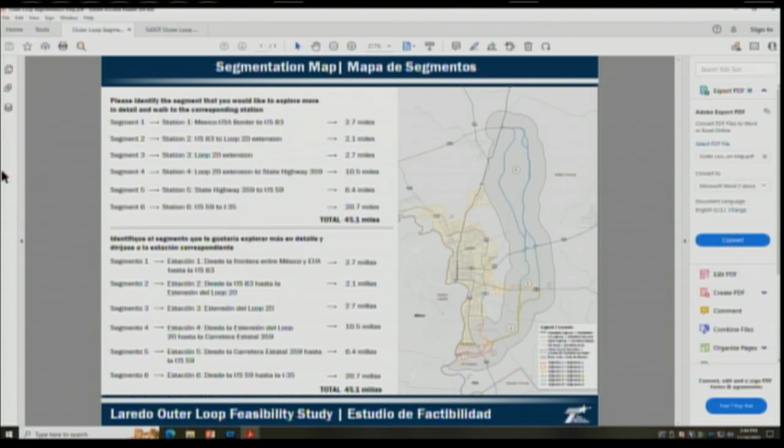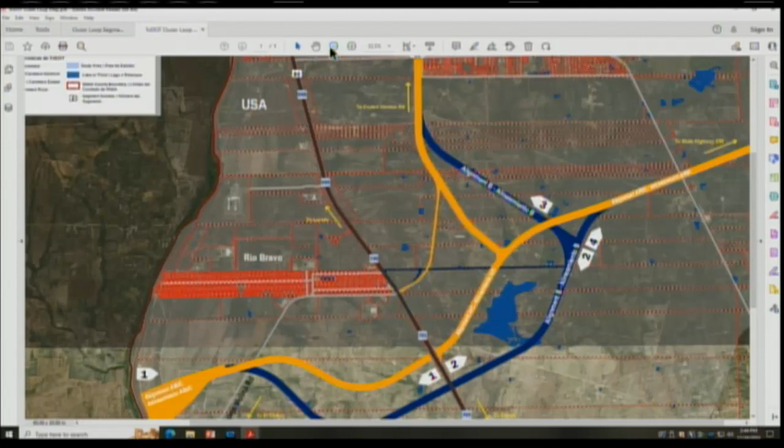With that said, you've said a lot of things, and I'm going to try to answer as much as I can because I think it's important for the public to know. You've made a couple of comments stating that we have not given you an opportunity to come in on this project. Mayor, with all due respect, it's a slap in the face to me, not to you, but I just want to point this out to the public. You had a couple of agenda items at City Council pushing the county away from our own project. You were the swinging vote, if I want to remind you and the public, to go and push Webb County completely out of the way for the city to do that.

What people don't know, and I'm going to make this public now, is that the day before, you and I and Robert Eads and Mr. Lalo Uribe stayed there in my office, and I appreciate you going to my office. For 2.5 hours we met. The first question I told you was, I just want 1% of the revenue. And you laughed at me. And Robert Eads laughed at me and said, why should we give you anything? That was what happened at that meeting.

And in all good faith, that is something that you've been using quite a bit to the county, that we're trying to work in good faith. There is no good faith with what happened at that meeting. With 1% of revenue, that's all the county was asking. And I threw it out there because I wanted to show that it wasn't in good faith that we're working.

And I will tell you this, regardless of whether you're here or not, Mayor, at the next council meeting, I will do everything I can, and I'm saying this publicly, but I'm tired of the way the City of Laredo is positioning itself, starting with you, Mayor, because you are the leader, or were. It's very disturbing to me that you bring up things in public, and I've kept my mouth shut for the longest time, because in all good faith, it's not Webb County or the City of Laredo that's losing. It's all of us that are losing.

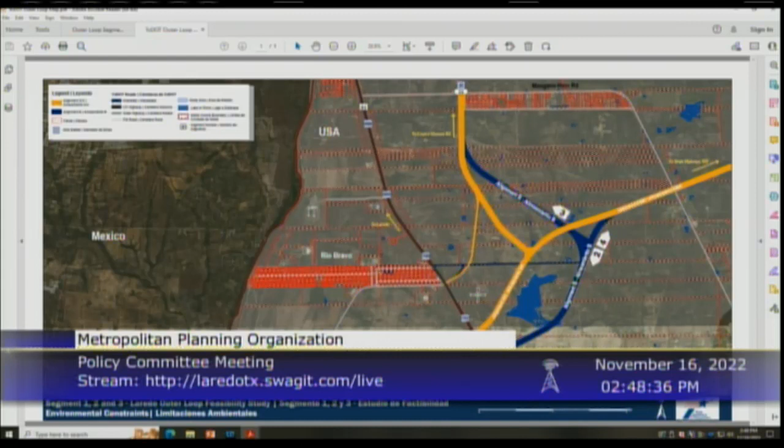If you have a problem with the 4-5 bridge, by all means, let's take segment 1 away and just do 2 and 3, because this is for the outer loop and mostly for the connection to finish off the loop. Because right now, you're not just hurting the people in the north, you're hurting the people in the south as well.

Yeah, let me just contribute a little more to that, just so we can be clear. Yes, we had that meeting. Let me go back to that meeting with Robert Eads and myself.

Mayor, Mayor, it's just about the agenda. It's unfair. No, but it's unfair that you started. I'm just trying to finish off. But let me explain. Hey, Mayor, if I may, please. Yes, sir.

These agenda items, I mean, this MPO is here to promote Webb County, the city of Laredo, which is a majority of Webb County, and that's all we're here for. I sat in this very seat. I know exactly all the issues that you all are looking at. I sat here, and I've expressed them to the judge, and we've talked quite a bit about it. So I think whatever we can negotiate will be a fair and equitable position.

Absolutely, because I'm an advocate for the city of Laredo. We all live, well, I say all of us, but the majority of us live within the city limits. We understand what the bridge revenue does. We understand about the bond covenants. We understand all those things.

So, Mayor, whoever's going to be there, I think we just need to have joint meetings, sit there and talk about it. We need TxDOT's input, we need public input, and sit there and hash something out. And we will, with the new council and the new commission. And I think let's just leave it there.

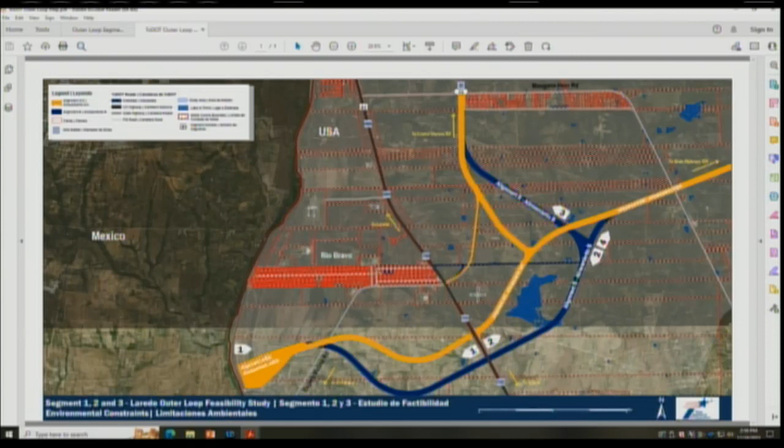But I think there's tons of opportunity here to expand how much money we get. And I see the situation with Hachar - instead of being reactive and using everything you have in one kitty to solve the problem, I think being a little bit proactive makes both things able to happen without hurting each other. What that does is it delivers 2 projects instead of 1 project, and then whatever's left over delivers another project.

Did I miss anything, Judge? Let's see, could I ask, do you concur with that? So I guess the additional or alternate funding that Mr. Garza is talking about is category 12. Is that a fair statement?

Mm-hmm. So that is something that we can certainly pursue. However, there's also the risk that this category 12 funding could be allocated for outer years, which means we'd have to delay the project further out, right? Delay the Hachar-Reuthinger project? Correct. So again, that's certainly an option.

I think we should pursue that option as well. I think we're at a point where we need to make a decision. Based on the presentation we're going to make here in a few minutes, we have to provide guidance to our consultant on which alternative we're going to pursue shortly, and our goal is still to meet that August letting, right? I know Mr. Garza may think that's a bit ambitious, but that's what we're trying, that's still what we're shooting for.

So if we potentially push the project out to be able to consider additional funding, that may be something we'll continue to investigate and pursue as well.

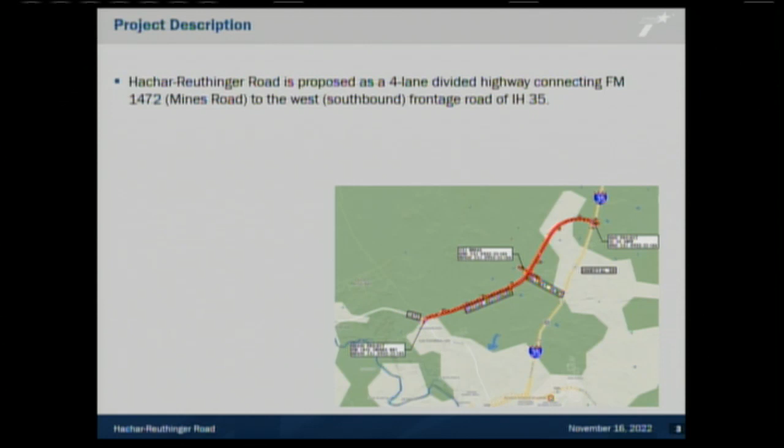Anna Duncan with TxDOT for the record. I'm going to present a little bit of what has happened, where we are now, and where we need to be. Briefly, to go over these items: the project, as we know it, is from FM 1472 all the way to I-35, and the proposed project is for a 4-lane divided highway. We have 3 bridges at 3 major water crossings: Cuervo Creek, Sombrerito Creek, and a tributary. There are 3 proposed intersections as well, about a mile and a half to 2 miles apart. One of those is, of course, Beltway.

From the utility side, we haven't gone in depth to that. That'll be part of what we work on with the city of Laredo. But there are 3 major high voltage power lines crossing, and several other utilities in the area. We'll be working on a full PS&E to include the grading, paving, bridge, drainage, traffic control, signing, pavement markings, and miscellaneous details.

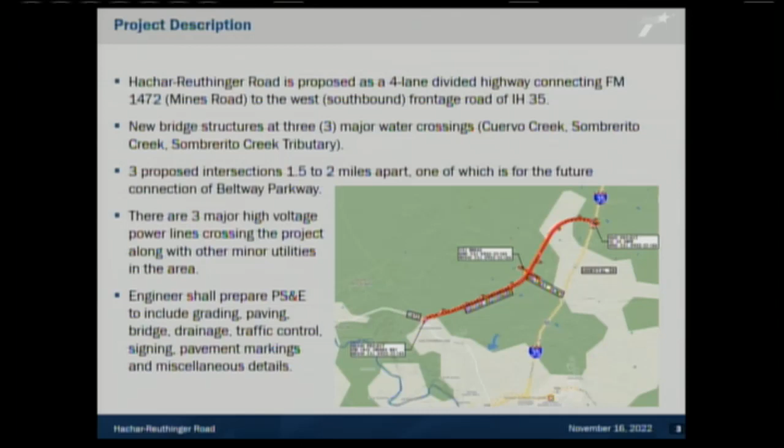And I'll stop you because you said it was for a 4-lane freeway. A 4-lane divided highway. Yes, but from the reports we've had here, they're only going to build the frontage roads. That's what they are, that's what they're identified as. You'll hear the explanation as to why that's the nomenclature we're using.

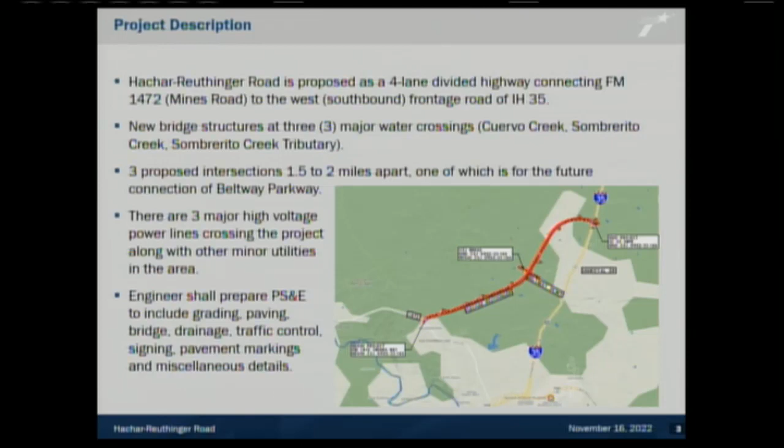Okay, so give me a few minutes. Okay, my ADD won't let me do it, but okay. I'm gonna remember it, I'm gonna remember it.

Just to go through the history: it was in 2016, 2017 when we had those AFAs executed with the county and with the city to begin both the Hachar and the Reuthinger phases. It was in August 2018 that Dannenbaum was contracted to begin work on the county portion of the Reuthinger. That contract expired at the end of December '19, and it was in June 2020 that we received that wonderful $51.7 million estimate we talked about.

Later that year in October is when we started having discussions about TxDOT possibly taking over development of the PS&E for the project.

In April 2021 is when we had that first AFA amended so we could begin doing the PS&E under TxDOT. In May, we did the AFA to amend the environmental with Webb County, so at this point TxDOT does have the authority under the AFA to do that work. Come May, we were requesting all the additional information that Webb and the City had to begin moving forward on the project.

In July 2021 we began receiving all the CAD files that were available and had been provided to us. That information was relayed to our consultant, who we had in mind to work with. They began reviewing it, and there were items missing: the draft drainage report had unincorporated comments, so we didn't have a final one. The ITS—Intelligent Transportation System—items like cameras, DMS signs, and lighting were not included. Survey control sheets were also not provided, and survey control was not established on the project.

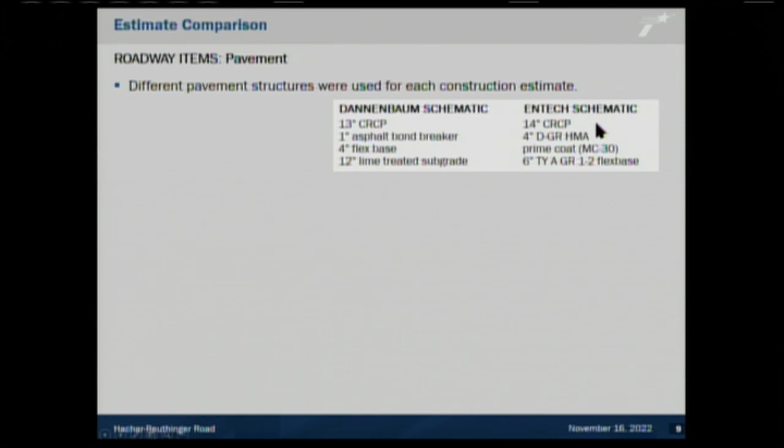We looked at the pavement because we needed a pavement structure that would withstand the truck traffic and meet state standards. So that is what we got to. That was an $18 million difference.

We looked at earthwork also. That was a $453,000 difference, and that's because we changed the design speed. That's where your question came in about why we're calling it frontage roads versus a 4-lane divided highway. If we kept it at frontage roads, we were working on a 55-mile-per-hour design speed. By going to a 4-lane divided highway, we're able to put it at a 65-mile-per-hour design speed. That was necessary because we expect traffic to be on these frontage roads for a long time, and we want to accommodate the higher speeds.

But they still are frontage roads. Eventually you'll have a 400-foot right of way, and the main roads will have 4 more lanes in the middle someday. Eventually it's there. They will become frontage roads, right? Yeah, they're frontage roads, you'll be able to access those and everything just as they were. You just won't have those main lanes.

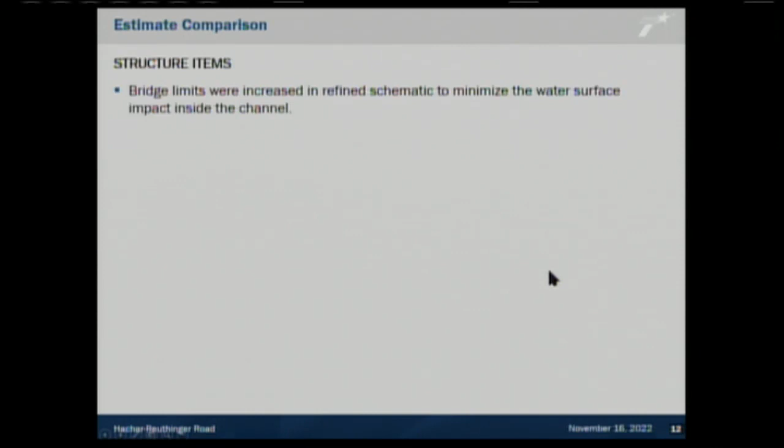So close for how long? How do we get past the current crisis of the shortfall? My question to you all is, can we complete to, if you want to show the map, Carrier Drive, which is the road that gets you to...

So I'm saying, can we phase it and do 1472 to Beltway? We have options that we've developed to show you what we can and can't do, and that's in the last slide, which comes after this.

So for our options, we're keeping the same geometry needed for 65 miles per hour, and keeping the same pavement design that's been approved to withstand the trucks. We're basing ourselves with a 10% mobilization and a 15% engineering contingency. That's what we're holding across the board.

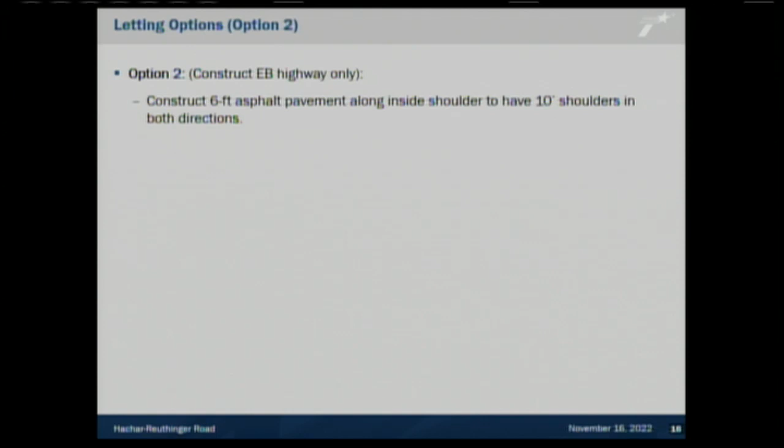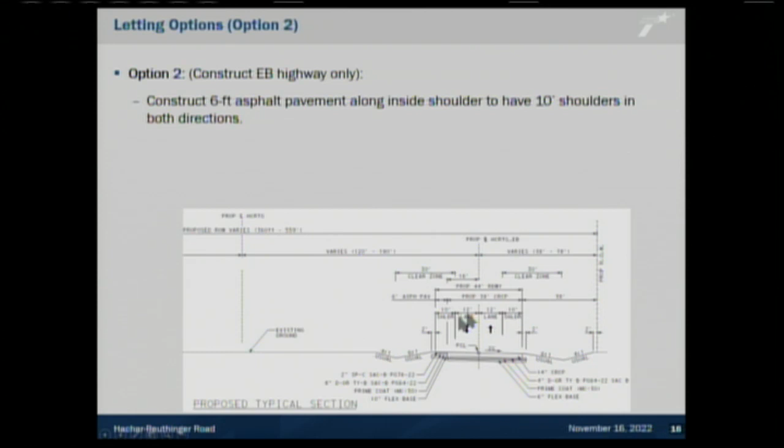The second option was to construct the eastbound highway only, so just the eastbound frontage road. Is it two-way or one-way? Well, it's two-way, but it's just on one side of the roadway. If you look at the drawing at the bottom, we would add a 6-foot segment to one side so we can have 2 12-foot lanes and 2 10-foot shoulders. Then we would have a ramp that connects back to join together, the way 255 was constructed.

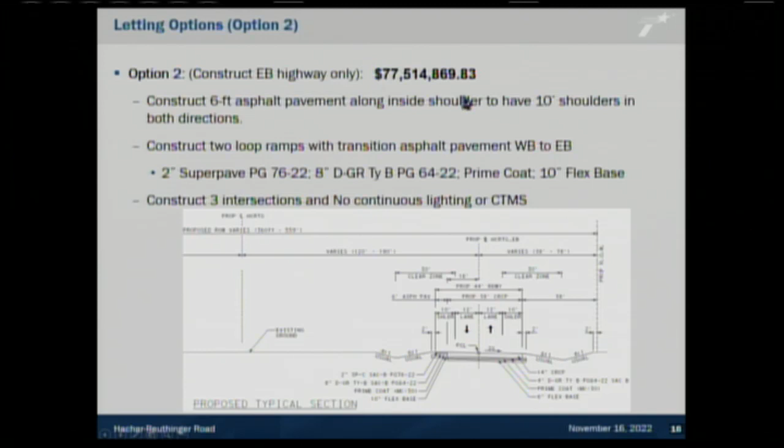That one is $77 million. The way 255 was constructed, as a single two-way? Yeah, so you have that single, and then we would just have this transition to be able to go to 35, connecting the way it's intended to connect to 35.

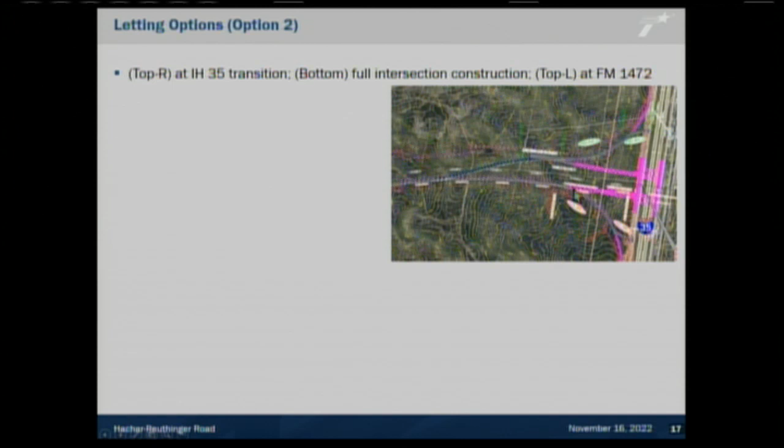Now this pink part, which is the frontage road bridges and everything that goes over, is part of the other project we're constructing, but it'll tie in to this project. That's at 35, at Carrier. So this is what it would look like. We would have two-way traffic at the intersections. We would build out the full intersections because we expect to come back in with the other side on another project soon. On the Mines Road side, we would just be connecting and transitioning back to our interchange there.

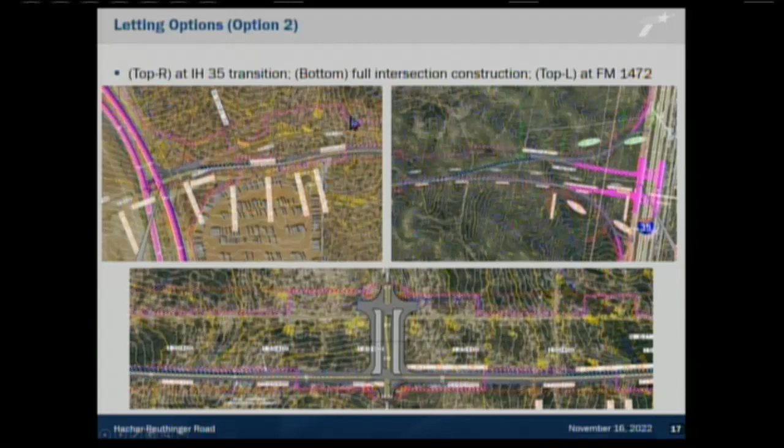So I guess the decision here then is... We're not dead, still have more options. Well, we have better options. Oh yeah, better option, okay.

This option is one of the lesser expensive ones, at $77 million. But the thing we have here is that you're building the roadway only on one side of your right-of-way. So if someone from the other side wants access, they're going to have to build a driveway that extends from the right-of-way line all the way over here.

Yeah, and ultimately when we come back with the final, that's going to go back to taking that out. The original thing is to build two-way traffic, because I don't think you want single lane, 65-mile-an-hour trucks going through like that.

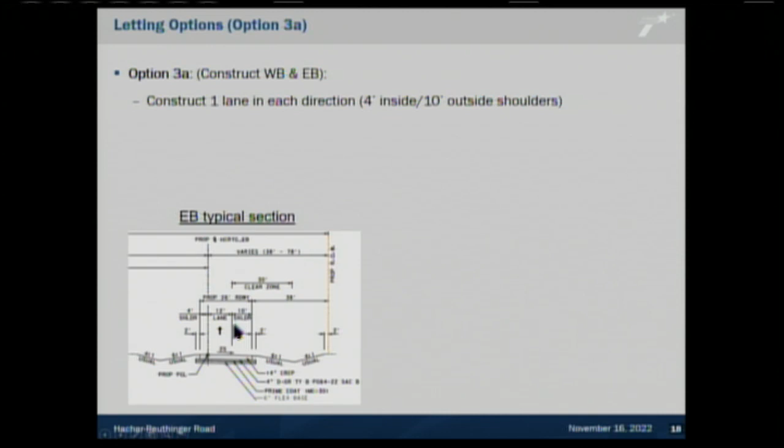Okay, hold on, I think she's got... so she's gonna get back to us with our option here. We will construct both the westbound and the eastbound, one lane in each direction with a 10-foot shoulder and a 4-foot shoulder, which is what's required.

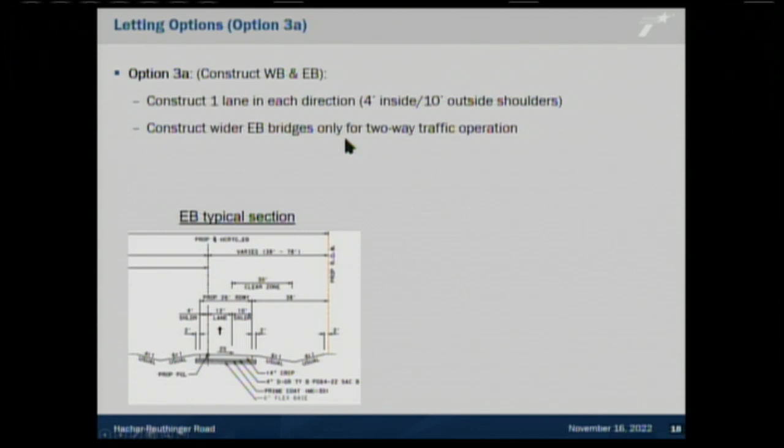We'll construct the eastbound bridges only. So when we get to the bridges, we'll transition to two-way traffic over the bridge and then come back out to have both directions of traffic. Your bridges, though, will be wider to provide for that two-way traffic.

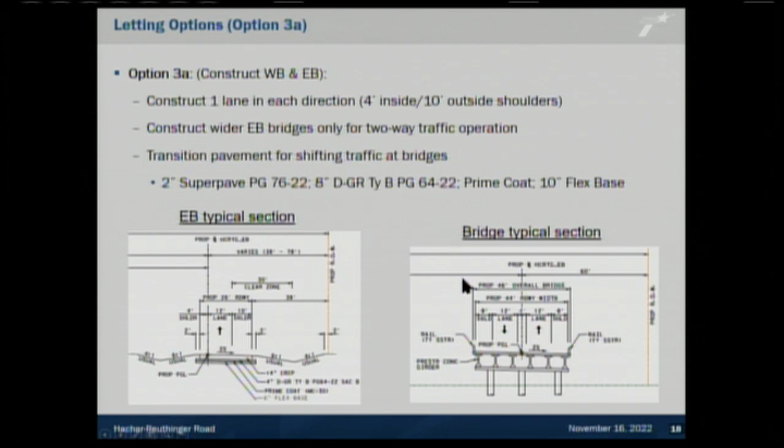You'll have two 8-foot shoulders and a 4-foot buffer in between, and again this is only on the east side. You'll have transitions using that same pavement structure, since those will be temporary. This option is $96 million.

This is what that would look like. You would have your one lane in each direction. Again, that goes all the way to 35? Yes, this is the full corridor.

And so when you come to a bridge, there's 3 bridges we talked about, you would be moving over to just one side. That way we only have to build one of the two bridges at each crossing. But when you get to 35, then what?

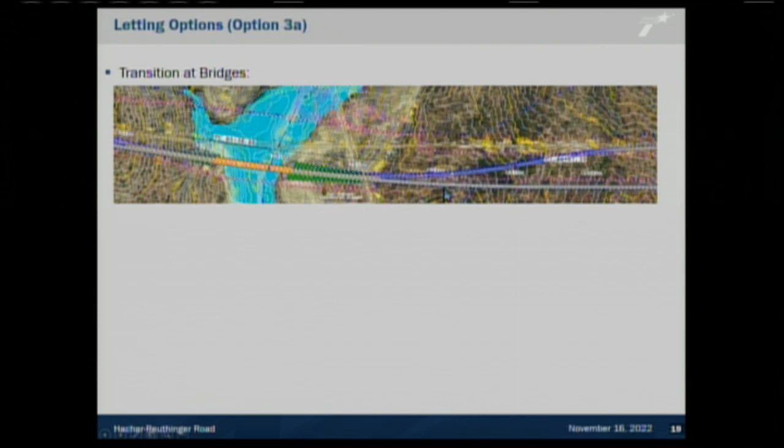It's two-way, you have both lanes, so you either go... I'm just saying you can't cross over 35, not until the other project comes in. So that other project is also scheduled.

What's the timeline on this? For this one, this project is scheduled to let in '23. What's the construction timeline? I believe we're looking at about 2 years. Has the Reuthinger portion even started to develop yet?

Do you have a cost estimate for building east and westbound up to Beltway? No, we didn't stop it at Beltway because there's also not the Beltway connection either. Well, what's the main road that goes into Unitec and Uniroyal? Beltway, but it's not constructed either.

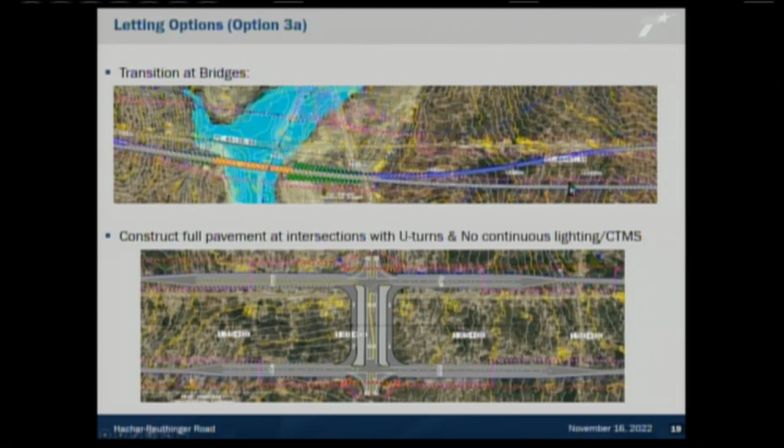Well, it's not. Okay, how much is it missing? I don't know, that's not ours. I don't know the distance. No, it's not 200 feet. From the end of it, probably 3 or more, but it's a long way to 4.

Could you identify yourself, please? I don't know if the city knows exactly how much. Jason, with TxDOT. It's about over 300, but Anna would know this project a lot more than I would.

But there's a large stretch between the Beltway intersection and the actual existing Beltway, correct? Yes. But who is building that? No, it's not on our project. That's why. I understand that, but maybe we can talk to Mr. Van Steenberg, see what their plans are, and maybe they can expedite their portion of it, because like I said, Reuthinger's not even developed yet.

So I think we need... I'd rather have the full section on the south, and I'll defer to the councilwoman, but it just seems like that would be a better deal. And then as Reuthinger comes on and we find the additional monies, we do the north section.

We have been approached by developers already wanting access onto the Hachar-Reuthinger roadway, but none of it has been on Hachar—it's mostly been on the Reuthinger portion of the project, as you approach I-35. So that's why our intent was to try to complete the entire corridor, to find a way to build the entire corridor. Well, Mayor, if I can—yes, ma'am.

I think the concern was that they need some kind of action plan so they can create the schematics and stay with the letting date. If we delay making a decision on which option, it's going to delay the letting date because they need to finalize which one of these options to move forward with. How much of a window do we have to make that decision? Is it going to be today?

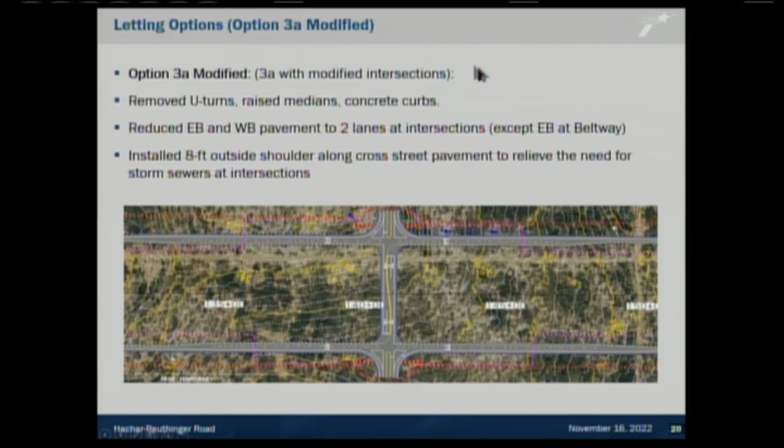So either way, all of these options are not really what we had originally planned, right? So we're still modifying, but the one they're preferring is option 3A, which is kind of like the same thing. What exactly is the difference between what we originally wanted and the preferred option? Only building bridges on one side.

And we only have one lane in each roadway direction, reduced. That's not the only thing—instead of having 2 lanes and 2 lanes, it's going to be 1 lane and 1 lane. And when you get to a bridge, instead of being able to cross 2 bridges in each direction, you're going to merge and cross 2-way over 1 bridge.

So the entire corridor is covered, from Mines Road to I-35. Your roads are being built at the location where, if you were to build access to the roadway, it's ultimately in the place it's going to be. We're not going to change any of that. In the areas of the bridges where we're transitioning, you would not have been able to access the property or roadway anyway because of the bridge itself. So this allows everything to fall in the ultimate location, and eventually we would build one more lane in, and then eventually we would build the main lanes.

Because if your entrance is right by the bridge, on the opposite side that's not being built, you still have to build a driveway. Yes, but there's a distance, so it's not as much, and we still have to look at where we're proposing future ramps for the main lanes, and those areas would also be restricted.

Let me ask a question. Do we have the $88 million anywhere that we could get to, to just say move forward with the original plans? And then do we have the 40 million for the preferred? The last page of your presentation shows the options and the amounts required.

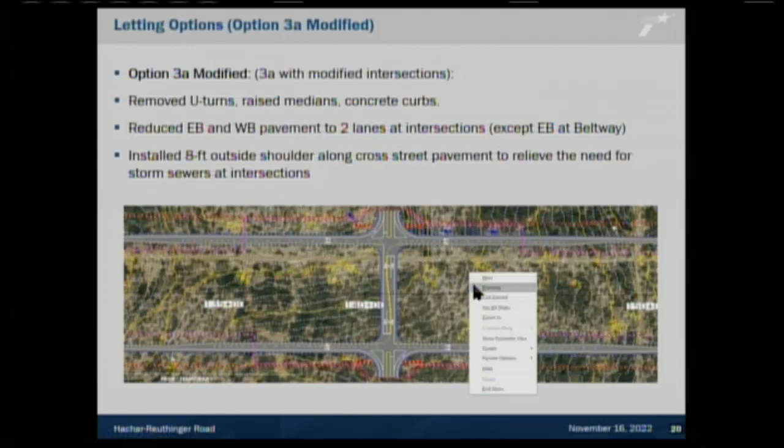So again, is there a way for us to find this $88 million difference? Do we have it anywhere that we need to allocate? I thought you said we had like 50 that needs to be allocated.

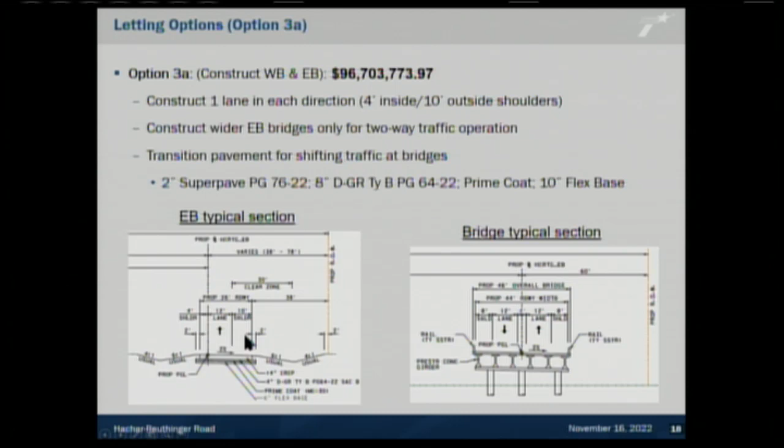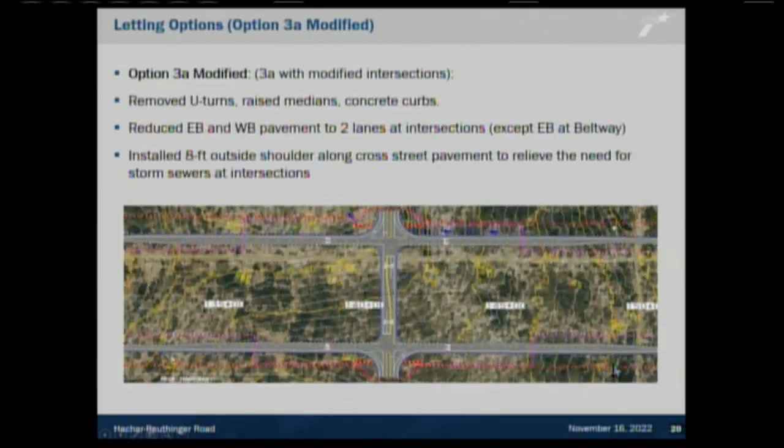In category 7, after those 1 million that were programmed, you would have 52.9 million available through 2032. But that would be tying all our category 7 through 2032. We're not going to be able to leverage any other projects. That's going to be it. If we use those, we would still have that other gap. But we need to get this project done.

We need to discuss this with Roberto. There's some other options maybe, but right now at the moment, I think it can be opened up to other categories, right? Because it's still not TxDOT on system at this time.

Correct, the Roberto Rodriguez with TxDOT. The only options right now that we have will be category 7, of course, those remaining funds that we can request to accelerate. Doesn't mean it will get approved. We can request to accelerate some of those funds to see if we can use them. We could try to qualify for category 12, which is the commission discretionary funds.

However, we may run into the risk that they may say, well, we'll give you the category 12, but it's going to have to move 4 years down the road, the project, because we cannot bring any new funds within the next 4 years. Usually right now our category 2, 4, and 12, which are mobility, cap per year. So if they give a category 12, they may push the project to year 5, which will be 24, 27, 28.

And if we want to still let it in 23 and find that category 12, that means that another district somewhere else will have to move a project, category 12 project, outside of that year. So we cannot increase that funding. Now, if we bring it on system, we can qualify for category 2 and category 4, but it will not be as much as $80 million or $40 million.